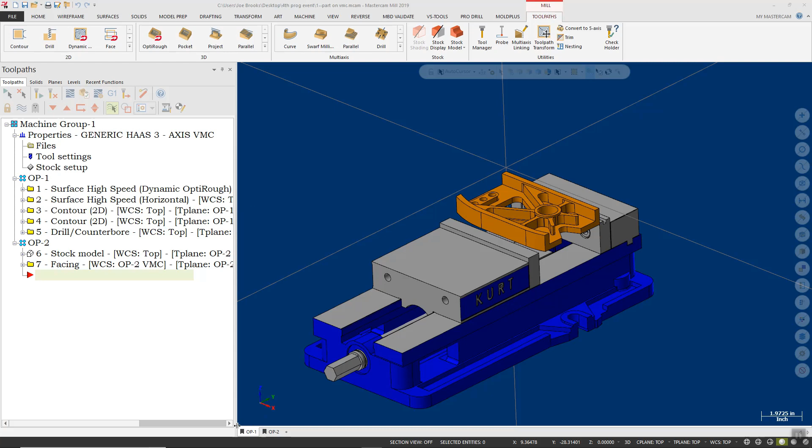So let's take a look down here first. With my bookmark set on op1, I have everything visible for op1. Now when I click on the op2 bookmark, you'll see the visual orientation of the part has actually changed. It shows a secondary piece of fixturing, and all of these things are available for our op2.

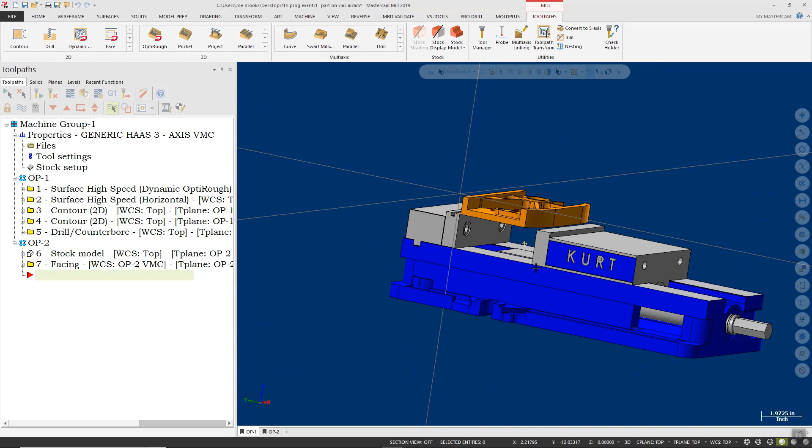Let's go back to op1 because that's where I actually want to concentrate this morning. So if I rotate this part around, the first thing I want to look at is what I've got up here as far as my high-speed dynamic OptiRough toolpath. Now I've got my advanced toolpath display on so you can see the endpoints of the arcs as well as the endpoints of the lines, and you can see that I have that toolpath filter turned on.

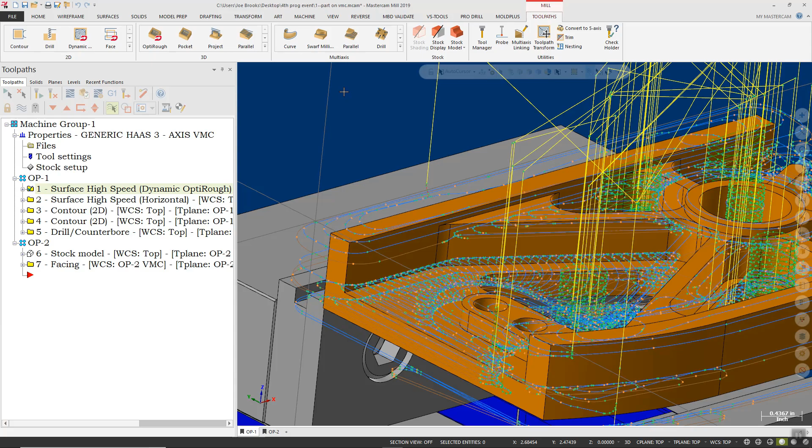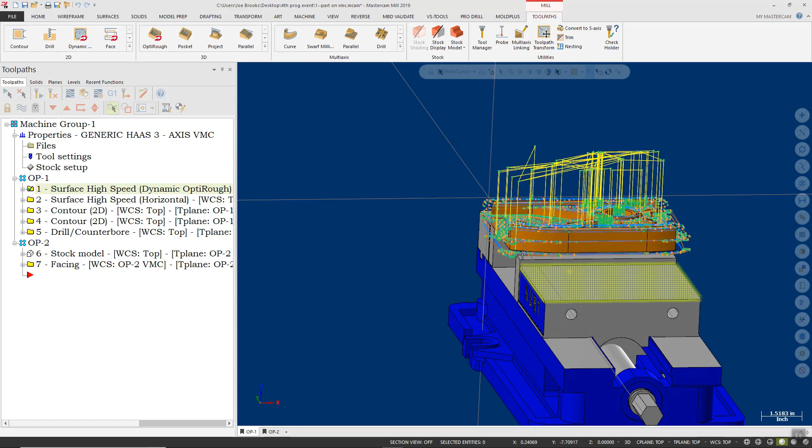Now, if you guys are like me in a lot of situations, what you'll end up doing is when you get the first run of a part, you'll want to do a prototype, which we'll do on a vertical, which I have done here. But then what happens when that actually goes to production? You don't usually run production of any kind of high quantity in a single station where you're flipping the part over—it's not very efficient.

So let's look at a way that we can take this program that we've already created and transfer it over to a horizontal without reprogramming it. In order to make that happen, we're going to do a few things.

The first thing we're going to do is come up here to the very top. On mine it's located about in the middle, yours might be over to the right-hand side, but what I'm looking for is the machine tab. I'm going to go over here to my mill, drop this down, and add in my 4-axis horizontal. All right, once that machine is loaded...

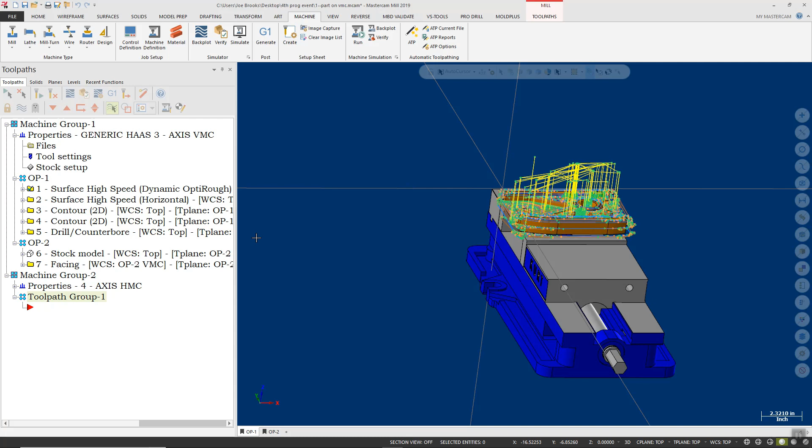The next thing I'm going to want to do is bring in some fixturing or other tooling that I can put this on. So if I look at my level manager here, what I have right now is my fixturing, the solid, stock, and the fixturing for op2.

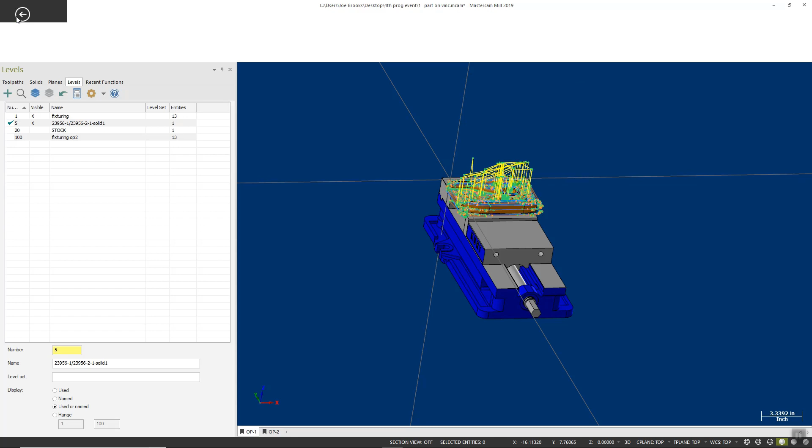So let's go back up here to the top. I'm going to go under File, down here to Merge, and what I'm going to merge in is my Tombstone fixture, which is a parasolid file. I'll go ahead and click Open. It's going to bring that in at an orientation that would be normal to the top view, or whatever orientation it was saved in previously. I'll accept the scale and rotational factors there because I'm going to position this dynamically.

Now, before I can position this dynamically, I really need this to be on a single level that's going to make it much easier for me to select. So I'm going to go ahead and create a new level by typing it in down here. I will select level 500 and label this level HMC.

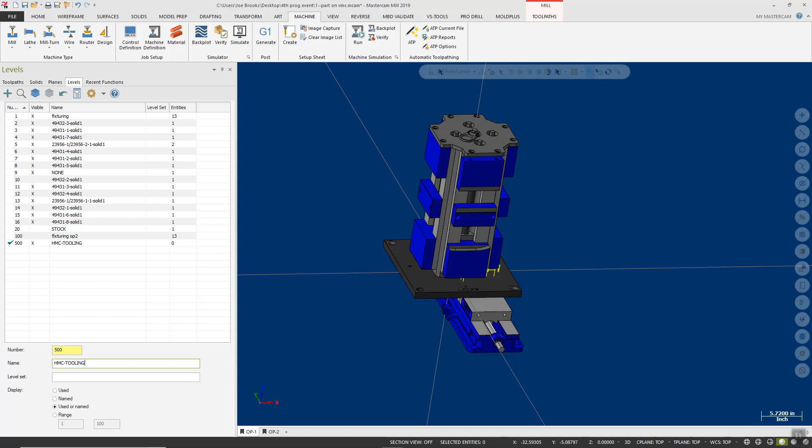We'll call that HMC tooling. Now I want to move all of these entities to that level.

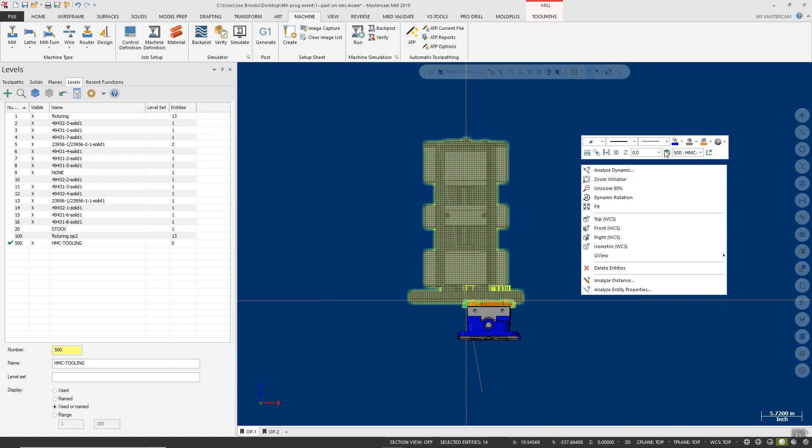One of the easiest ways for me to do that is rotate to the front view and drag a window around everything, selecting that whole fixture. Once I have that whole fixture selected, I'll right-click, go up to my levels, select Change Levels, and move those entities to that level. Now we can see that 14 entities have been moved to my HMC tooling level.

Now I don't want all of these extra levels in here, so I'm going to do a little cleanup. I'll right-click over here, come down to where it says Purge Empty Levels, and say Purge All Empty Levels. That's going to give me my original levels with the addition of my HMC level.

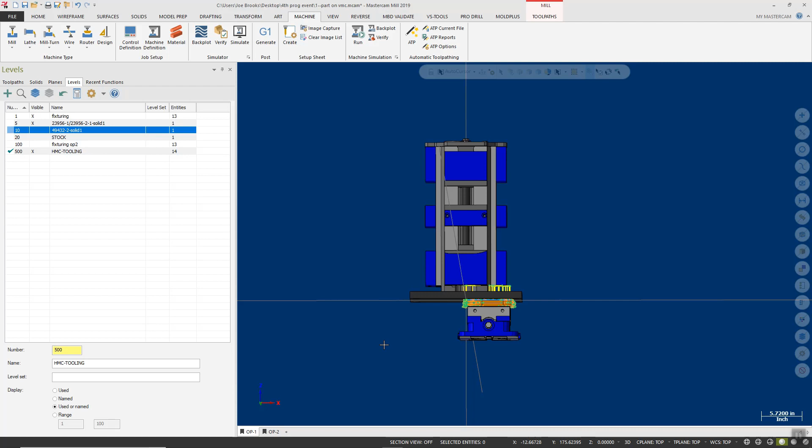To make positioning this tooling upon the stock and fixture a little easier, I'm going to turn off the visibility of the fixturing and the part, and turn on the visibility of the stock.

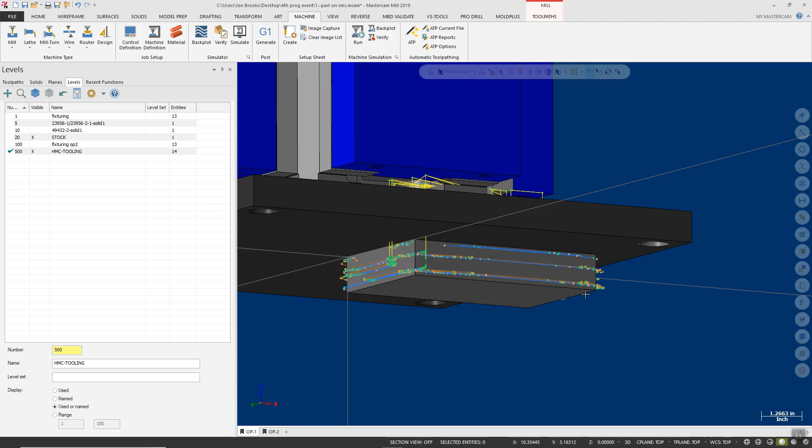I can see the stock there, and if I want this to look a little clearer, I can turn off my toolpath display by using Alt plus T. That will turn off my toolpath display so I don't have to look at the toolpath on the screen itself.

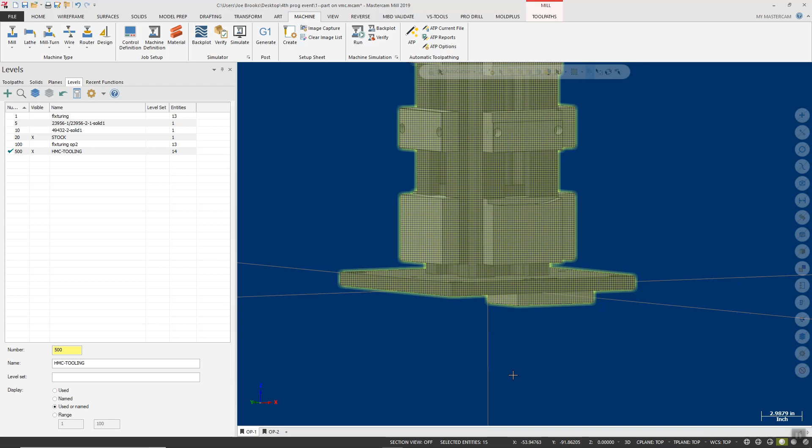Now let's go ahead and position this fixturing onto the part. I'm going to drag the window around all of that. You notice it selected the fixturing as well as the part, so I can simply click on the part to deselect that.

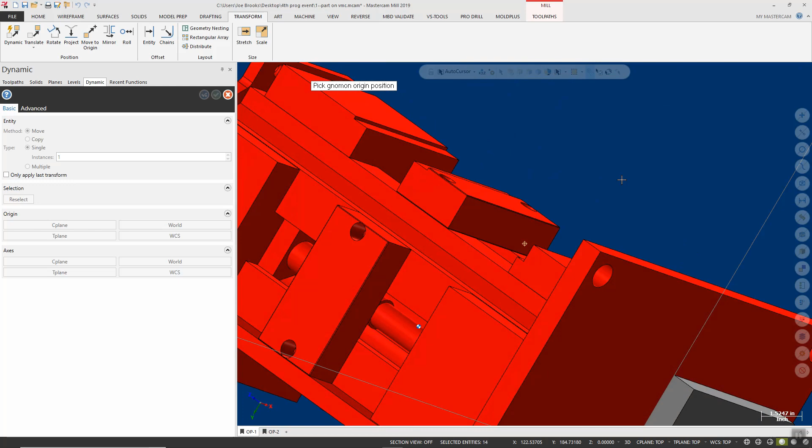Once that pre-selection is done, I'll come up to my Transform tab and select Dynamic Transform. It gives me a gnomon here that I can use to position the part. I want to rotate this around so I can look at the lower lip of this cutout on those jaws, and I'll select the midpoint of that.

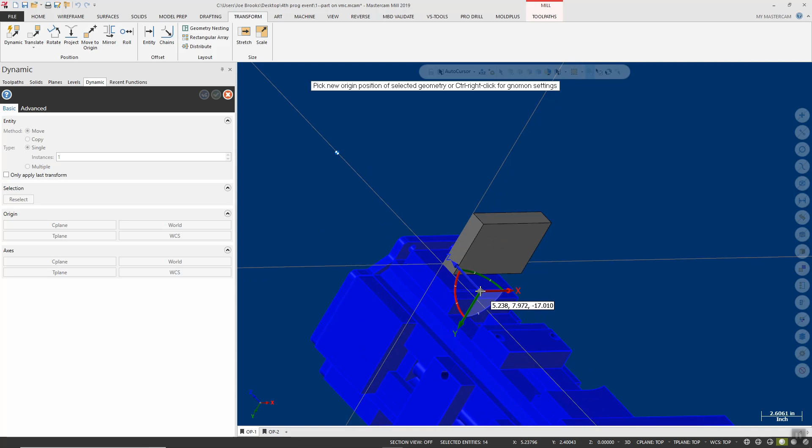Doing that would allow me to move it in any single axis by clicking on these lines, but I can also click on the gray sphere in the middle and drag the entire part to reposition it. So I'm going to zoom in down here and click the midpoint that is the lower edge of my stock, right there.

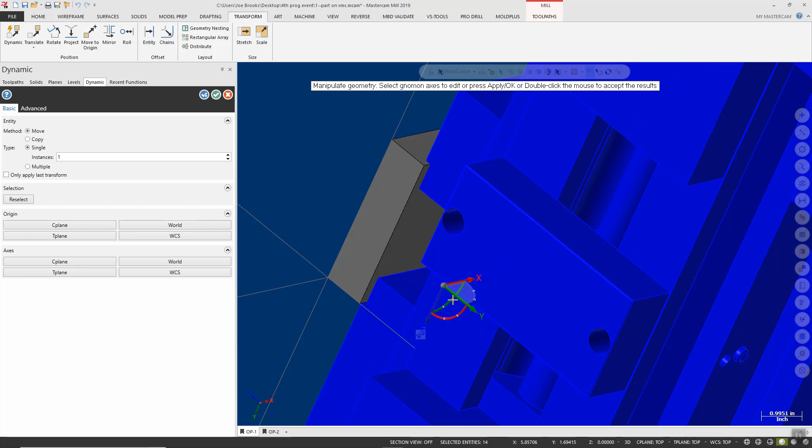After I have it positioned like that, I'll grab around here to rotate around my x-axis, and rotate that negative 90 degrees. So doing that, we have the positioning done of our fixturing around our stock.

That's pretty fantastic. Now, I don't like to have this as the result color, so I like to clear those colors, which I'll do like that.

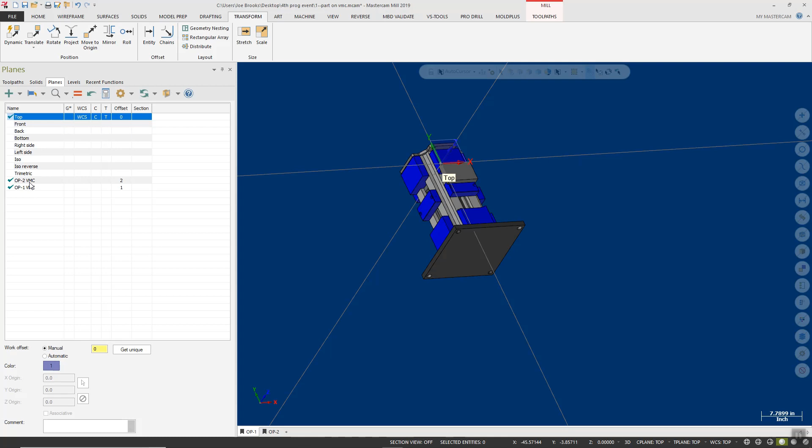Now, the next thing we need to do is, if we look under our planes, you're going to see that I have an op1 and an op2. But in order to make this work, because most horizontals are programmed around center of rotation, we need a work coordinate system that's going to represent that.

So to make that happen, we're going to come down here and drag grab our gnomon. This will put us into the new plane creation dialog, and we can just snap it to the bottom here. But as you can see, it's snapping to that face, and it's not really giving me a center point.

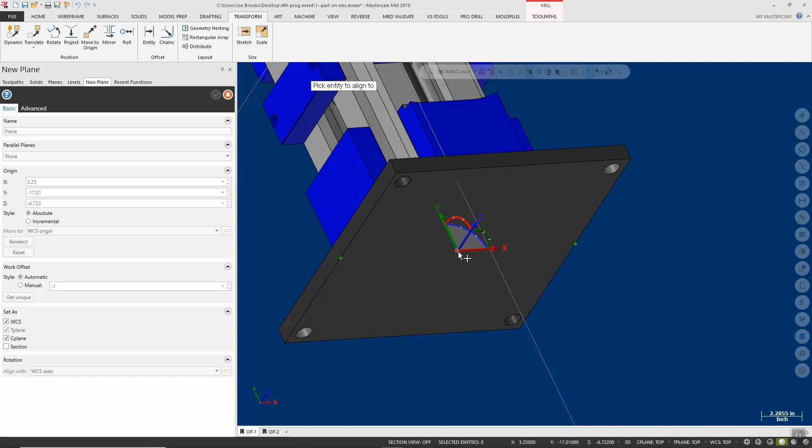So what I'm going to do is select the midpoint of the edge of this face, and I'll select its opposite midpoint over there. Doing that is going to highlight this point in the center that I can use to select.

Okay, so that's there, and that looks pretty good, except Z is facing the wrong way. I actually want my Z axis to face up through the middle of the tombstone, which I can do simply by rotating negative 90 degrees around that X axis.

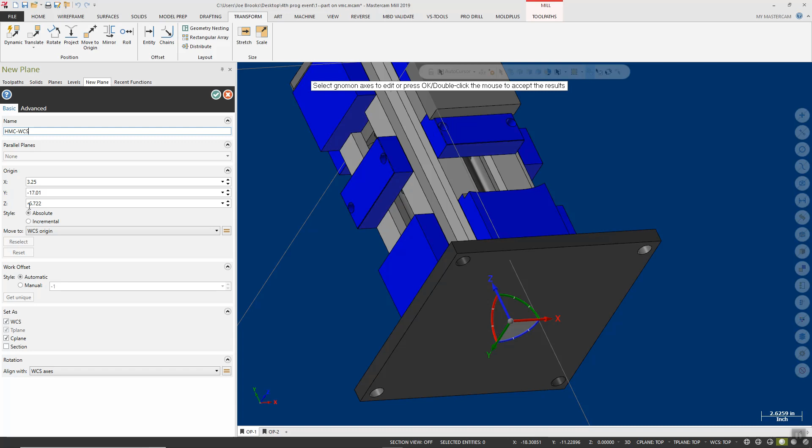Once I have that done, I'll give this a unique name. I'm actually going to call this HMC WCS for my horizontal coordinate system. And then I will accept that.

So now I have my fixturing positioned on my part, and I have a coordinate system that represents what we can actually use within our machine tool. So let's go back over here to our toolpaths page.

And what we have now is we have our machine, we have our toolpaths up here. So to make this a bit easier for myself, I'm going to grab this first operation right here, all of these toolpaths included. I'm going to right click and hold down my mouse button, and drag these down here and release above this group.

I will tell it that I want to copy those toolpaths after. Now it's going to give me a warning about operation compatibility. That's a coolant difference between the machine I have loaded and the machine I'm using for my vertical. It's going to tell me that a similar tool already exists. I'm going to say yes, I will accept those similar tools and move on.

Now I have those operations down here under my horizontal. All right, but that's not all. Because one of the issues when we move a part from a vertical to a horizontal, especially if we are programming from center of rotation, is that this part now exists in positive Z space in relation to center of rotation.

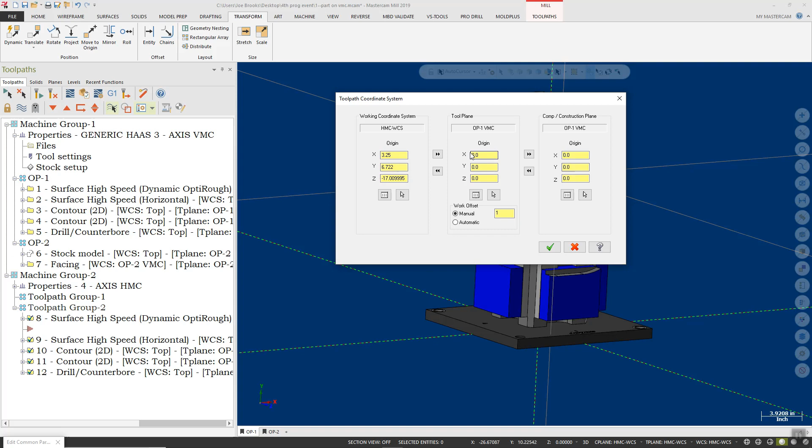The next thing I'm going to address is my plane issue. I'm going to tell it that I'm using my HMC WCS for my coordinate system, but I'm going to leave my tool plane and construction plane there for op1. Now, this will generate G-code in relation to the corner point of this part. If you need it to generate G-code in relation to the center point of rotation, we can go ahead and leave those set as horizontal WCS for now, and we will need to create an alternate plane that is rotated to represent that.

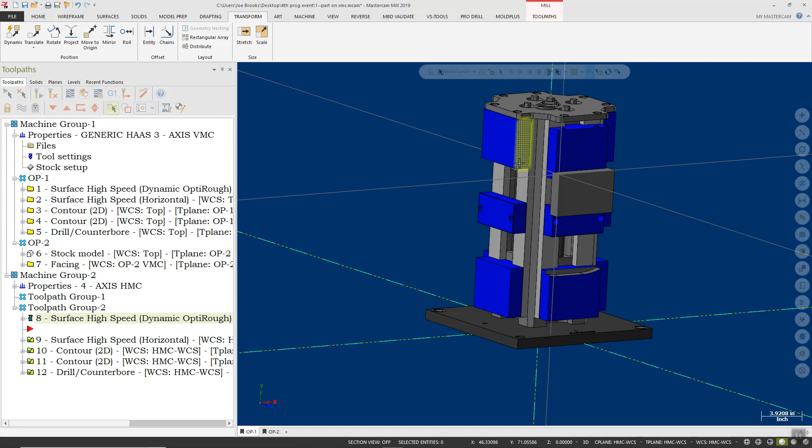So let me actually show you both ways. If we were to leave this set with our op1, like so, we can green check mark that, regenerate these, and we would be able to post these out with center of rotation being the center of our tombstone here. However, our point that we're referencing would still be this origin point up here.

So what if we really are programming off of center of rotation? Well, if we really are, it only takes one other small change. What we're going to do is go into our planes. Instead of creating a whole new plane, we're going to right-click on this HMC WCS, and do something called Create Relative To. We're going to create a front plane relative to the WCS we created, but I'm not going to call it front. I'm actually going to call it B0. I'll click my green check mark. Now I have my B0.

If I want to get this B0 to have a very specific work coordinate output, I can change this to manual. And I can change this to, let's say, 3, which would be your G57 normally.

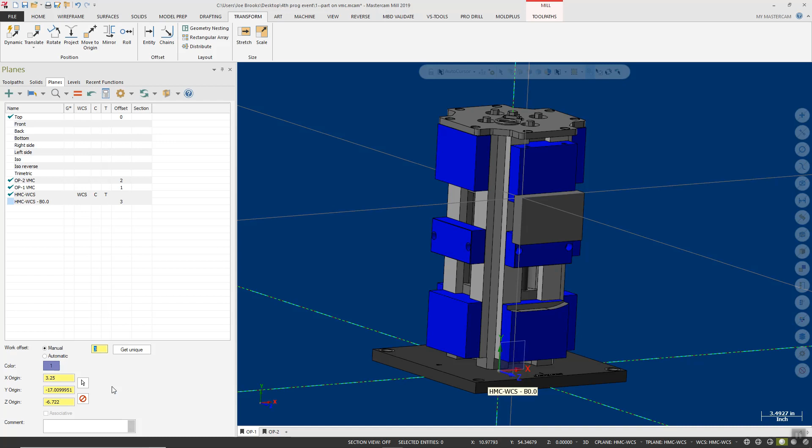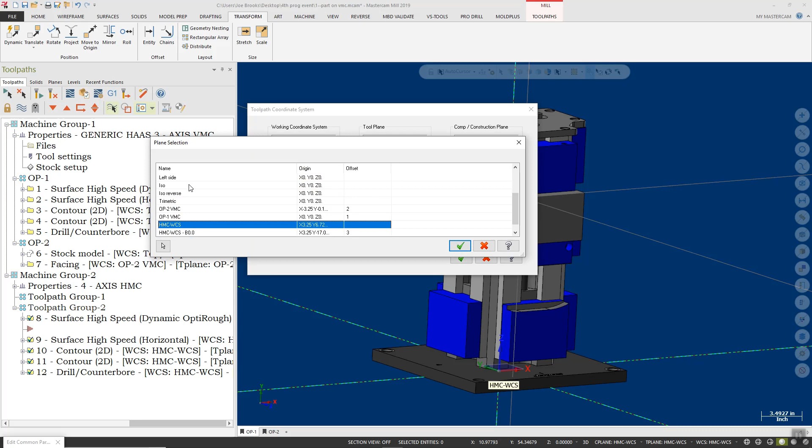Now all we need to do to use that is go back here into our toolpaths. We can click on the entire group again. We can right click, say edit selected operations, edit common parameters. This time when we go in here, we will select planes again, and we're going to change this tool plane to this HMC WCS B0. And we can green check mark that.

Now, we're going to go ahead and accept this because there's a couple things that I want to show you that's going to happen here.

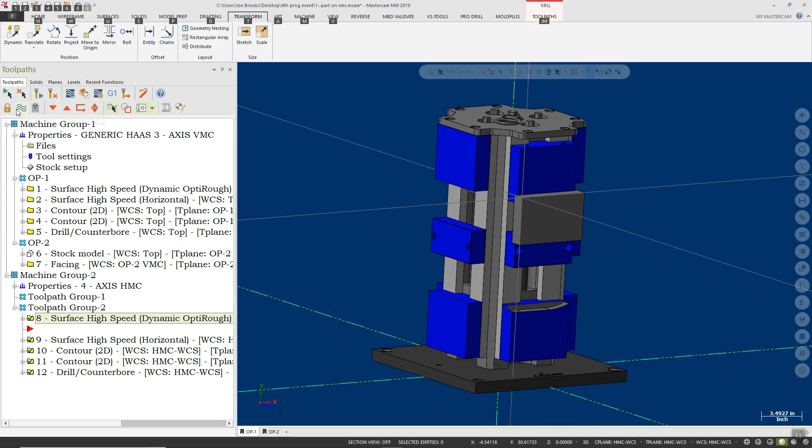As soon as that is done processing, we can look at this. If we look at our toolpath display, I'll turn that back on by hitting Alt and T, or alternately you can come back up here and say toggle display of selected operations and turn that on.

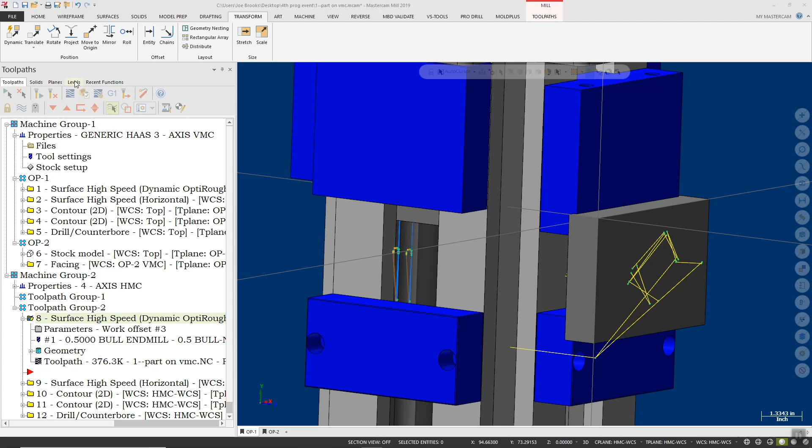Now when we look at this, we see a couple issues. Some of those toolpaths are now projected down. In order to see that a little better, let's look at this. I'm going to go into my levels and turn off my HMC tooling, and I'm also going to turn my part on and my stock off. Now you see that those toolpaths are way down here at what would be the origin point.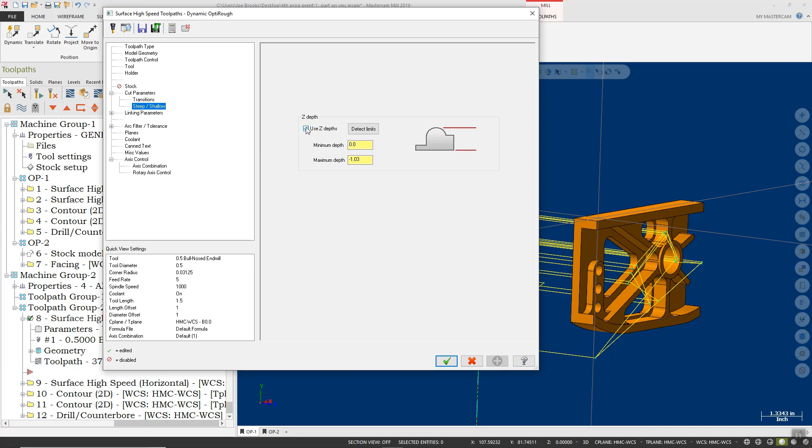Let's look at why. If I look at my surface high-speed dynamic OptiRough, in my Z depth under my depth limits, I have select use depth limits on. What I need to do is either turn that off or modify those depth limits to work in accordance with my new plane. Let's go ahead and turn that off. We will reprocess that, and we can see that now these toolpaths are all approximately where they should be.

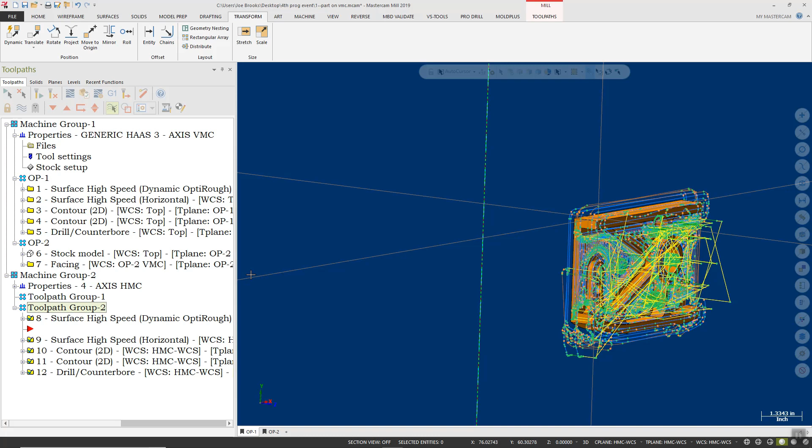All right, well that's great, right? Let's turn our fixturing back on so we can see that. So what about putting it on the other sides of the tombstone? Well, we can actually do that fairly easily.

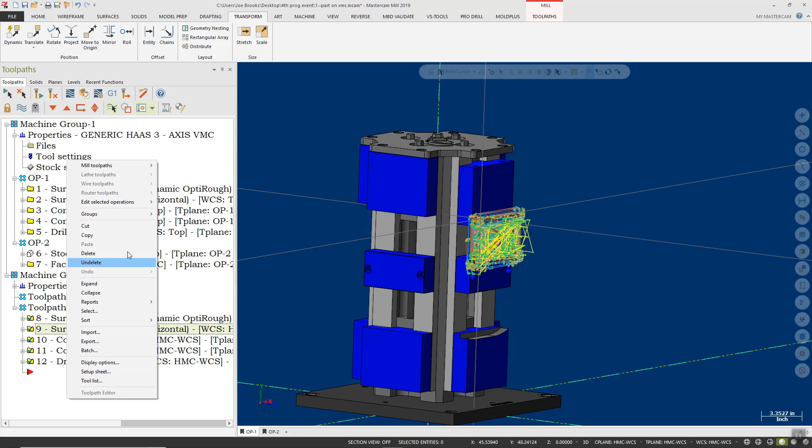What I'm going to do is drag my little line indicator here down to the bottom. I'm going to right click over here in my operations manager and come up to mill toolpaths, then come down and select transform. What I want to do is a type of rotate. My method will be tool plane, the source will be the NCI, and the order will be operation order.

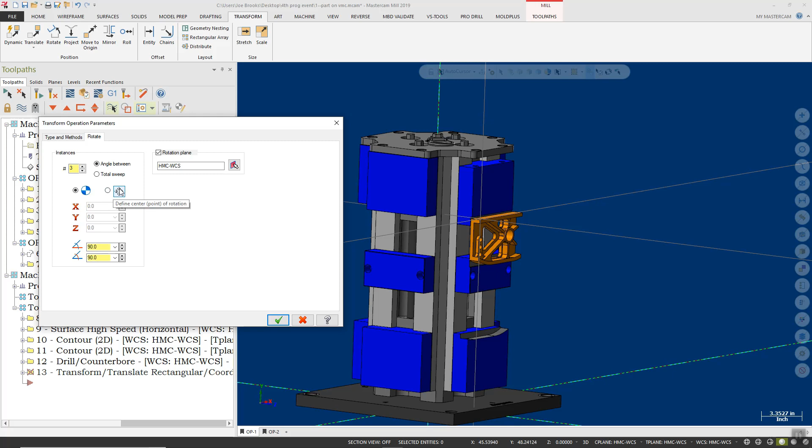Now over here, the group that I'm going to select will be this operation group for our horizontal machining center. I'll come up here to rotate. The plane I want to rotate about is going to be that HMC WCS that we selected. Now, once we select that plane, we must also come over here, because that plane's origin point and Mastercam origin do not align. We need to select the rotational point by selecting the origin of the HMC WCS right there.

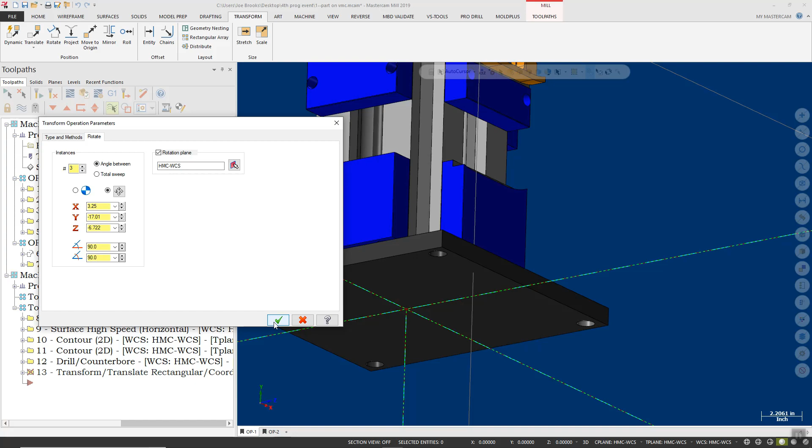Now, how many times? We're going to do this 3 times, starting at 90 degrees with 90 degrees between each increment. All right, we'll go ahead and accept that. Now, as we can see, we have parts on all 3 sides of that, plus our original group would give us the 4th.

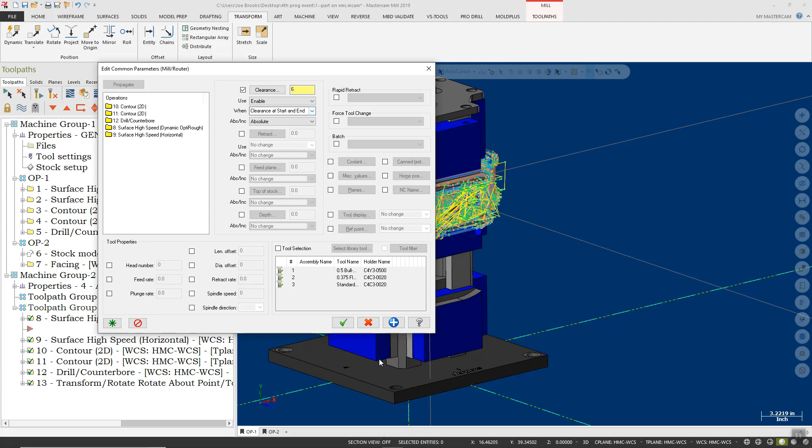Now, what if we need to change clearance for rotation? Well, changing clearance for rotation is fairly easy. We will come up here to Mill Toolpaths, or to our Edit Selected Operations, Edit Common Parameters, and we'll add in a clearance of about 6 inches. We will enable that clearance. When will we use it? We will use it at the start and end of each operation, in an absolute mode. We'll select that, regenerate those operations, and we'll see those come in here with that clearance enabled.

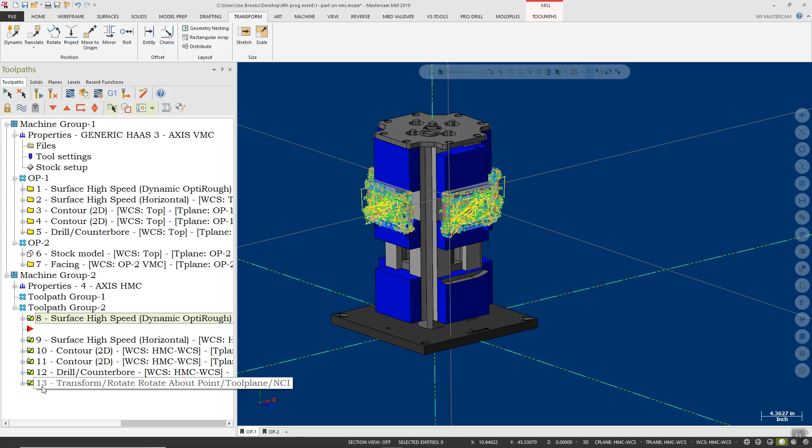All right, now let's look at a couple other things we can do to save some time when we're talking about our programming time here. When we look at this surface high-speed dynamic, for instance, and we look at our arc filters, we can see that I have an arc filter of 5 thousandths, and I have it set to create arcs in the XY plane.

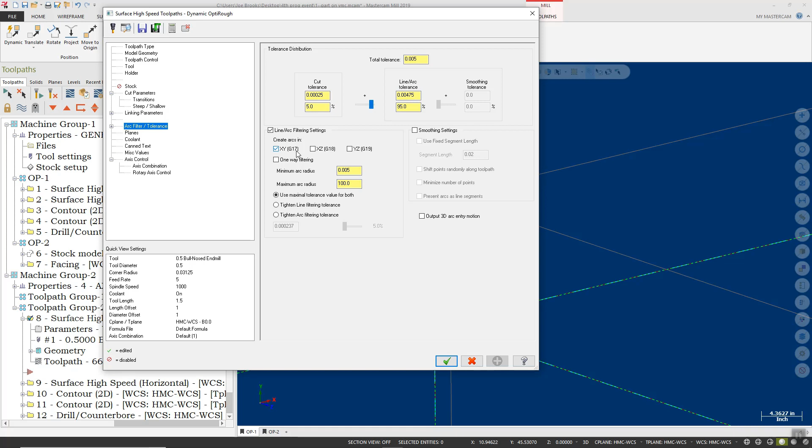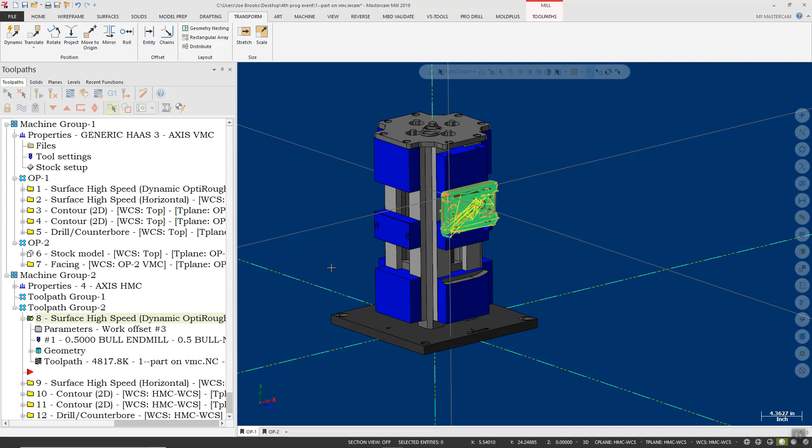And we can see that with my advanced toolpath display, all of these little green dots that you see here represent endpoints of lines. So we can see all of those long line segments and arcs that I had have now been converted into these tiny little segments.

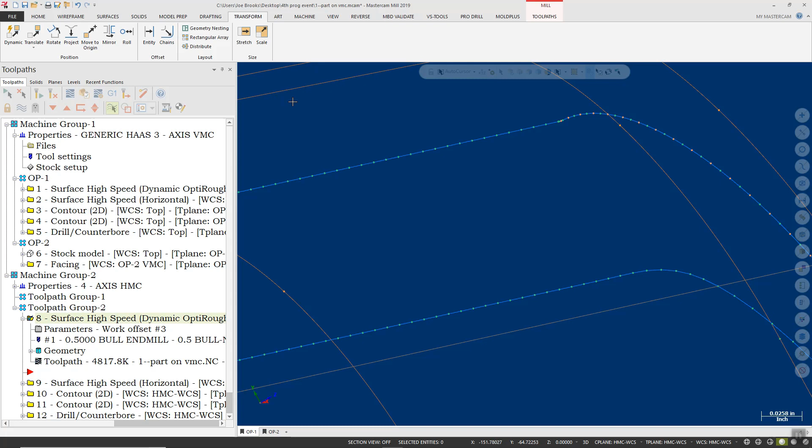If you ever want to see that a little bit better, you can go up here under your Home tab and use something called Analyze Toolpath. That's going to allow you to click on these, and it's going to tell you what they are at any given position. These are all lines, and you have one small little arc right there. You can see that by the G2. You can also see that I didn't have coolant on there, which is something I would want to go and fix.

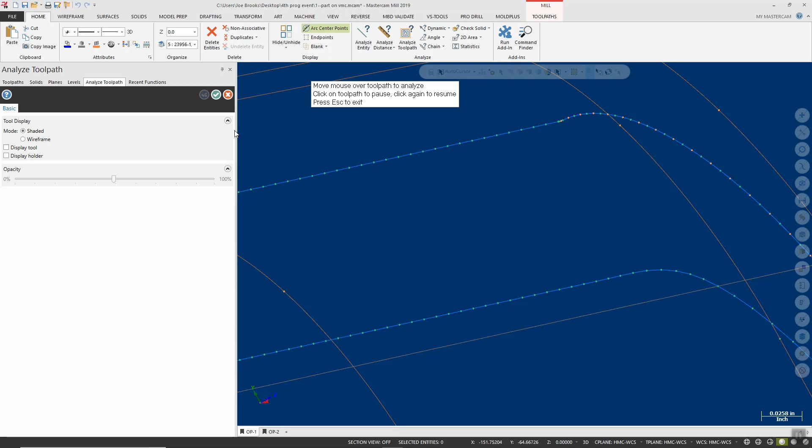So now let's look at what happens if we just turn that back on, again with the same total tolerance of 5 thousandths. I'm going to drag that slider over there, telling it that I would prefer that tolerance to be used to create arcs. Let's reprocess that toolpath.

We can see now what we have is where all those little line segments were, we now have much longer, much smoother arcs and lines. Let's take a look at those now. We can see that these are still lines, but nice long lines instead. And we have a nice arc here. We even have arcs here and here.

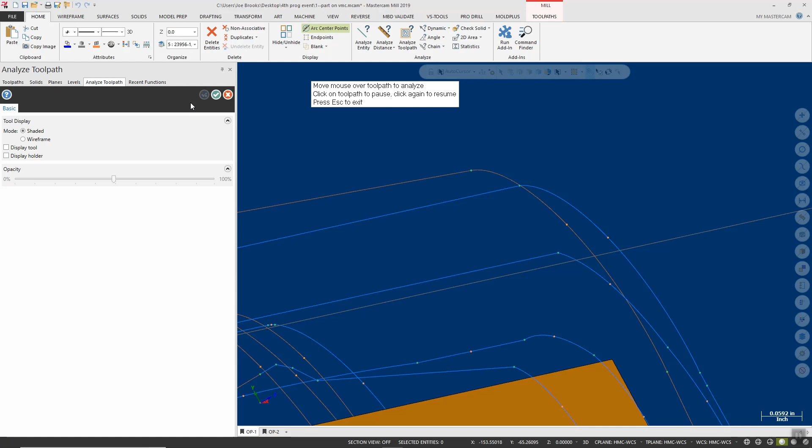You can also see that, again, the coolant is not turned on. That's actually a pretty good point to make, because that's something I used to forget to turn on all the time, as I've obviously done here.

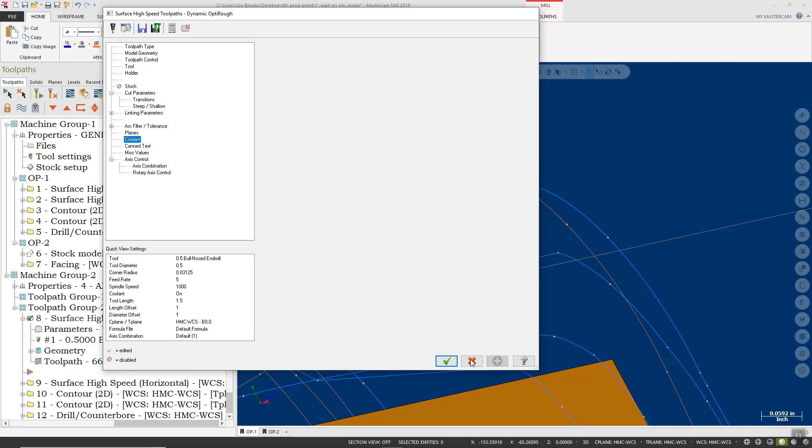So what do you do for that? I mean, we could go through these and select them one at a time, come down here to coolant and turn it on, and everything's fine and dandy. But what if we don't want to make those changes one at a time, one at a time, one at a time? What are we going to do with that?

Well, we can do our group editing, right? We can select the group, right click, edit selected operations. But what about this?

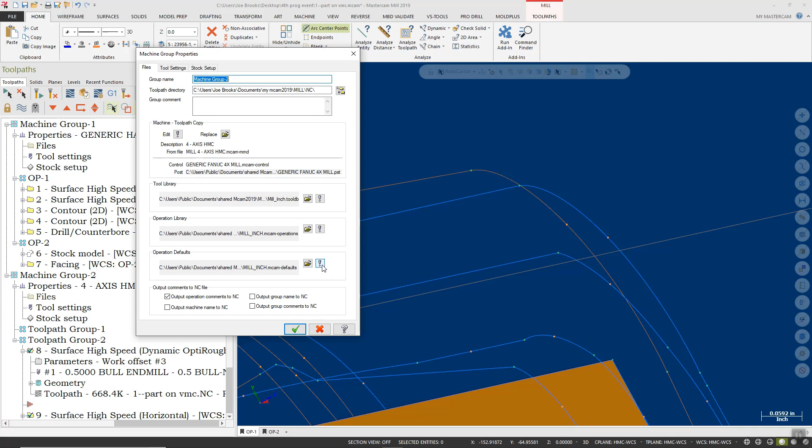We can also come in here and look at our files, and we can look at our operation libraries and our operational defaults. We can actually edit these operational defaults, and we can come in here and find any particular operation or even a whole group of operations.

We can take every single operation that exists within our operation library, right click, edit selected operations, edit common parameters, and go into coolant and have it default to on. Now we don't have to remember to turn on coolant anymore.

What about the toolpath filtering? Well, that's something else that we can also adjust in these operations. So as we go down here and look at some of these, right here, surface high speed dynamic OptiRough.

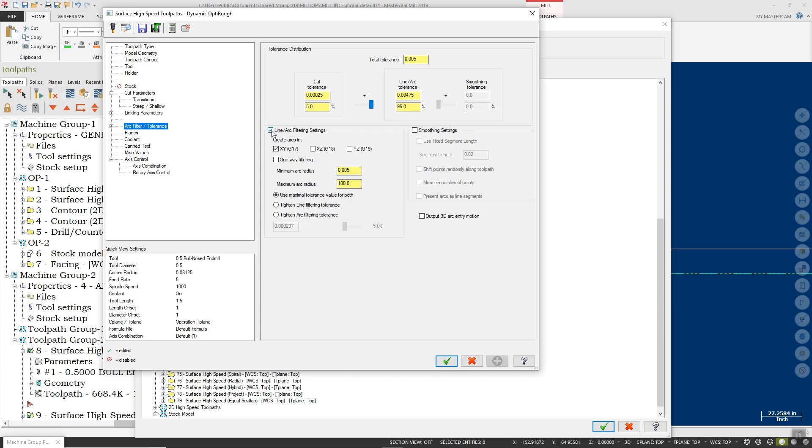Well, we can expand this. We can look in the parameters of this, and look in our arc filter tolerance, and say okay, we want it to be 0.005, so we want it to default to arcs with those settings on. You can do that for all of your operations here.

You can come down here to your finish parallel toolpath, and if you have settings that you know work consistently for your surface finish parallel, then you put those arc filter settings in here. You're like, all right Joe, well that's great, but what if I don't have them the same for everything? What if sometimes I use different settings for stainless than I do for aluminum?

Then you save a separate library. You'll have one library up here for your aluminum, one for your stainless steel, or you can separate those libraries by machine tool, if that's what works out best for you. But you'd be surprised how much time you'll save just by eliminating a few of those button clicks.

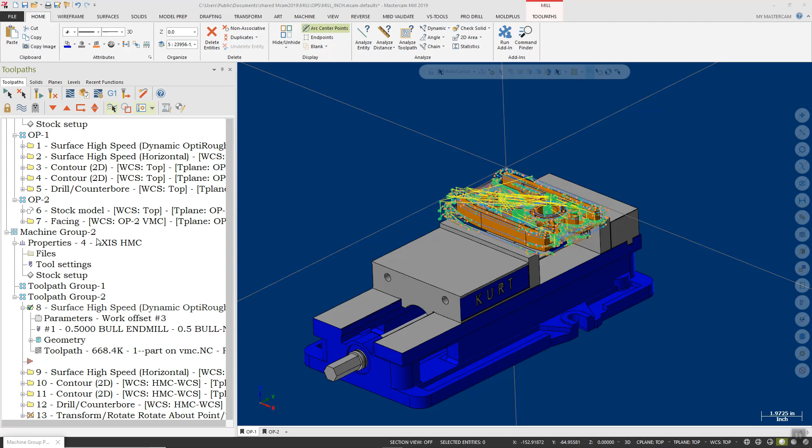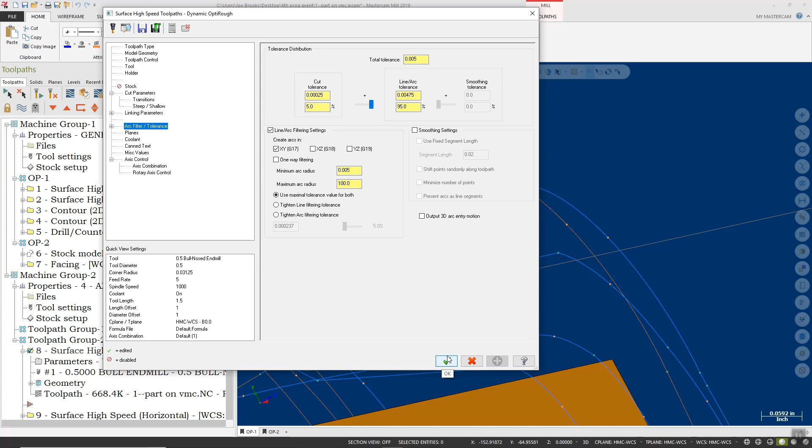There's one other way that you can edit those operational defaults as you're going through there. If you don't want to go through and adjust those as a group, from within the parameters of your operation, you always have this button right up here, which is Save Parameters to the Defaults file. So when you find something that works, you can click Save Parameters Defaults file. Those parameters will be saved, and you'll be able to use those next time you start a new file and start going through that.

So those are just a few ways that you can save time when you're going from machine to machine, as well as save time with the actual programming method.

And none of those things will require a flux capacitor. They won't even require Dr. Brown or even a DeLorean. Although if you want to get a DeLorean for fun, that's probably a great idea. All right, everybody.